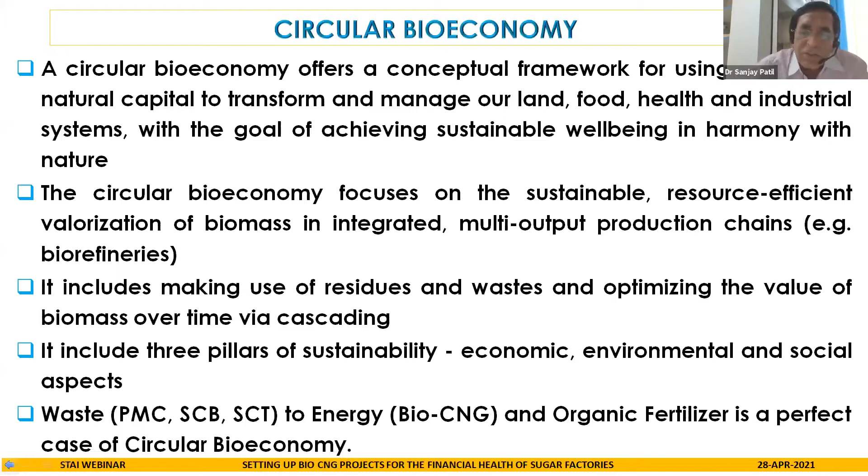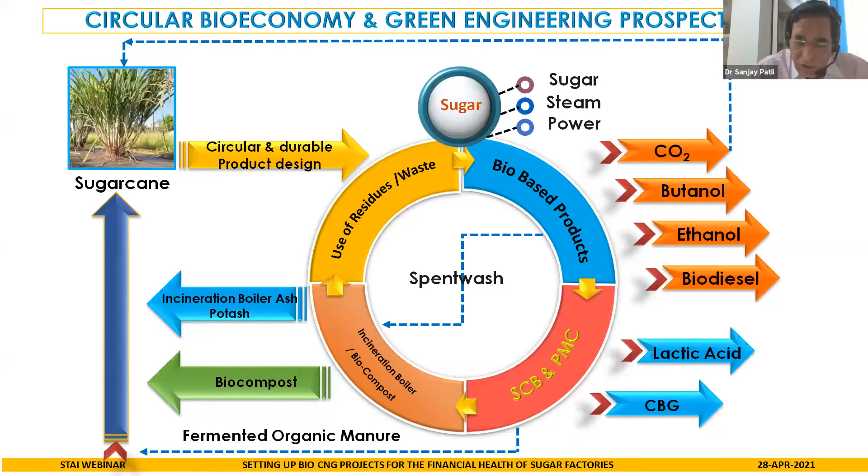And here you can see I have tried to represent the circular bioeconomy in the case of the sugar industry in this diagram. In the sugar industry, we produce different products: sugar, steam, power. We can also produce many other products such as lactic acid, biodiesel. We produce ethanol, we produce carbon dioxide, and CBG is one of the products which can be added to this. And while producing CBG, we can produce fermented organic manure which can be recycled back. So this is the basic concept of the circular bioeconomy, and the production of CBG and fermented organic manure perfectly fits into it.

As far as the importance of CBG production is concerned, most of you must know India imports almost 77% of its crude oil requirement and almost 50% of its natural gas requirement. The target of the Government of India for 2022 is to reduce import of crude oil and natural gas by at least 10% and increase the contribution of gas in India's energy mix from the present 6.5% to about 15%. The world average is about 23.5%. And the Indian sugar industry has a big potential to produce almost 12,777 million cubic meters of biogas per year.

And CBG on a commercial scale has many benefits. It can reduce the import of natural gas. It saves foreign exchange and strengthens our energy security. It also utilizes agricultural waste and other waste such as cattle dung to produce CBG. And it is very important to reduce emission and pollution levels, and it can generate rural employment and increase farm incomes.

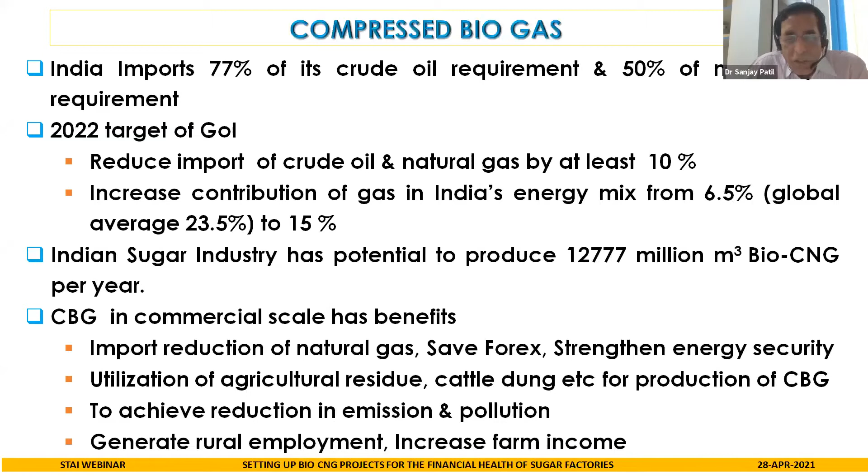Mr. Joseph has already dealt with the SATAT program. It is launched by the Ministry of Petroleum and Natural Gas, providing a developmental effort that would be very useful for vehicle users as well as for farmers and entrepreneurs. The CBG produced will be transported through cascades. Mr. Joseph has already shown a picture of cascade cylinders, to the network of the OMCs' depots where you can deliver this CNG, and it is planned to roll out almost 5,000 CBG plants across India in a span of about 5 years.

So there is a good opportunity for the sugar industry to participate in this SATAT program. And not only the SATAT program, there are many other supports given by the Government of India. As I told you, the Ministry of Petroleum and Natural Gas has floated the expression of interest for setting up CBG plants, and they are offering.

So apart from the SATAT program, the price which is fixed in the SATAT program for CBG is 46 rupees per kg. And then there is also, from the Ministry of New and Renewable Energy, notified central financial assistance of rupees 4 crore per 4,800 kgs of CBG per day, and a maximum cap of about 10 crore rupees per project.

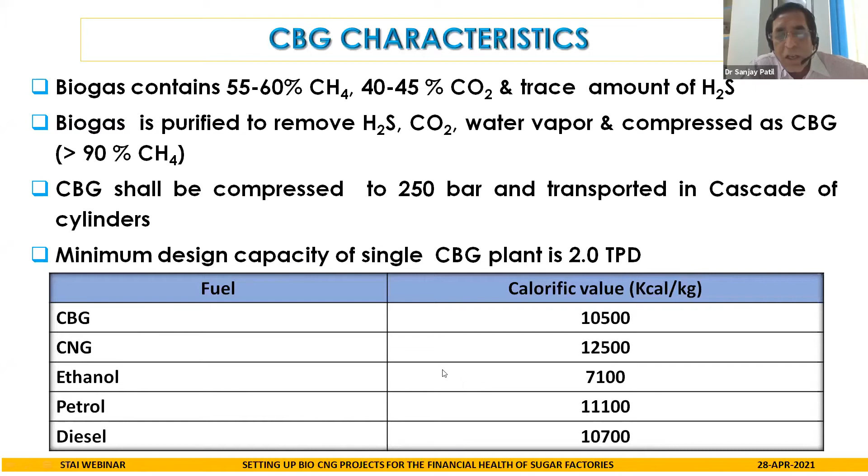The CBG has to be compressed to 250 bar and transported in cascade cylinders. The minimum design capacity of a single CBG plant is 2 tons per day, as per the expression of interest floated by the government. And you can see in this table, I have tried to compare the calorific value of CBG with other fuels, and the calorific value of CBG is quite good compared to even ethanol, and therefore in future we will have very good potential for marketing CBG.

In VSI, we have been working on the production of biogas from various raw materials. Now we are setting up 2 pilot digesters with some financial assistance from one of our member sugar mills, where we will try to maximize the biogas yield from PMC, sugarcane bagasse, and sugarcane trash, and also try to use a mixture of all three raw materials. And, a very important aspect, we will also try to evaluate the efficacy of the solid and liquid fertilizers, the digestate coming out of these digesters, because this is going to be really important for the cost economics of the CBG plant.

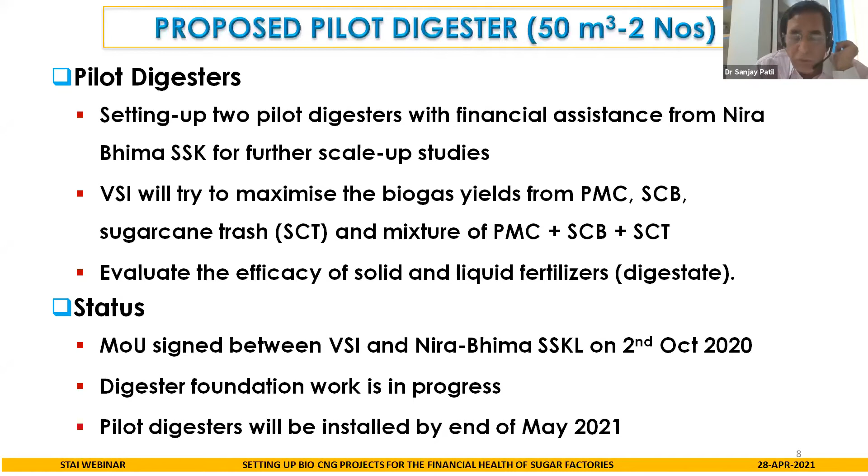Our MOU with this sugar mill, Nira Bhima, has been signed. Our digester foundation work is in progress, and by the end of May, probably we will be able to commission these digesters. I am giving you, based on our laboratory research, the present status of our research and the theoretical potential. From PMC, we can expect on a wet basis about 130 to 150 cubic meters of biogas. And right now we have achieved 120.

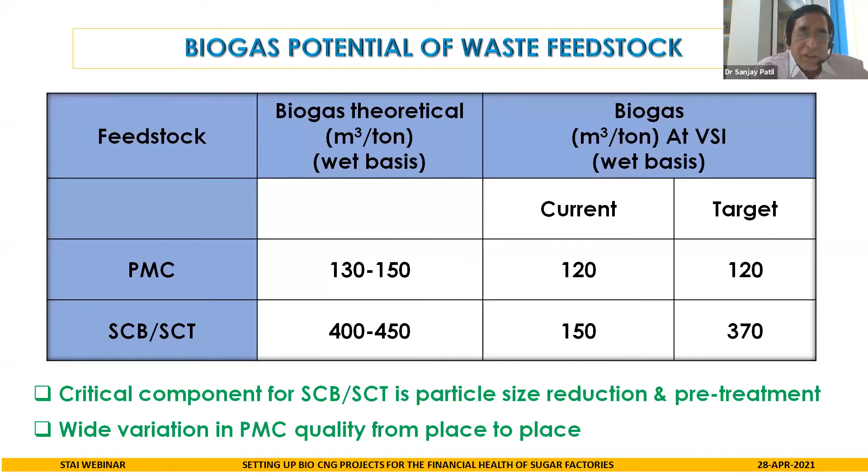That was our target. From sugarcane bagasse and trash, the estimated theoretical biogas yield is somewhere around 400 to 450. Our current yields are about 150. We want to reach about 370. But Mr. Joseph has explained that even if you go up to 200 or 250, that will be quite economical. Of course, in the case of sugarcane bagasse and trash, the critical component is particle size reduction and what kind of pre-treatment you are going to use. And as far as PMC is concerned, there is wide variation in the composition of PMC from place to place, and therefore there will be a good amount of variation in the biogas yield from PMC also.

So these are the technology components of the CBG plant. I am considering the use of lignocellulosic raw materials also, and therefore I am considering pre-treatment in the case of biomass and other agro waste. Then it will be followed by anaerobic digestion, conversion of organic matter to biogas. Here we'll try to maximize the yield from PMC and other agro waste.

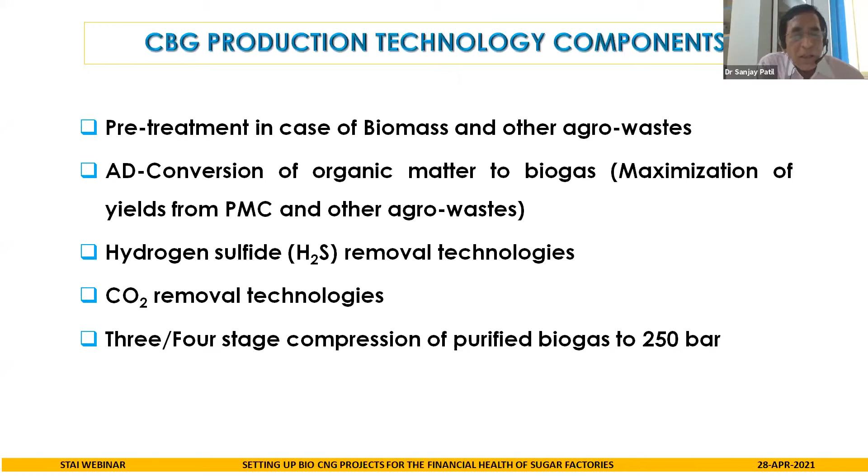Then there are technologies available for hydrogen sulfide removal. There are technologies available for carbon dioxide removal also. And this will be followed by 3 or 4 stage compression of purified biogas to 250 bar.

In fact, in pre-treatment, we have been using different kinds of pre-treatments. We have very successfully used hydrodynamic cavitation. It is a patented technology. And very briefly, I will explain that cavitation is a phenomenon of formation, growth, and a very rapid collapse of

cavities in the liquid. And the collapse of cavities generates localized hotspots with very high pressure and temperatures, with formation of localized shear on the molecule, and this leads to the formation of highly oxidant OH radicals. The shear and the OH radicals then pretreat the lignocellulosic biomass physicochemically, favoring the utilization of sugarcane bagasse and sugarcane trash. We are also trying to use steam explosion.

Steam explosion is a physicochemical treatment technology in which biomass is heated to about 160 to 260 degrees centigrade at a pressure of about 7 to 50 bar for a very short time of about 30 seconds to 20 minutes. And then the pressure is rapidly released, causing an explosion effect on the cells of the molecules of the lignocellulosic biomass, and this treatment then helps in biogas production by loosening the hemicellulose and lignin molecules.

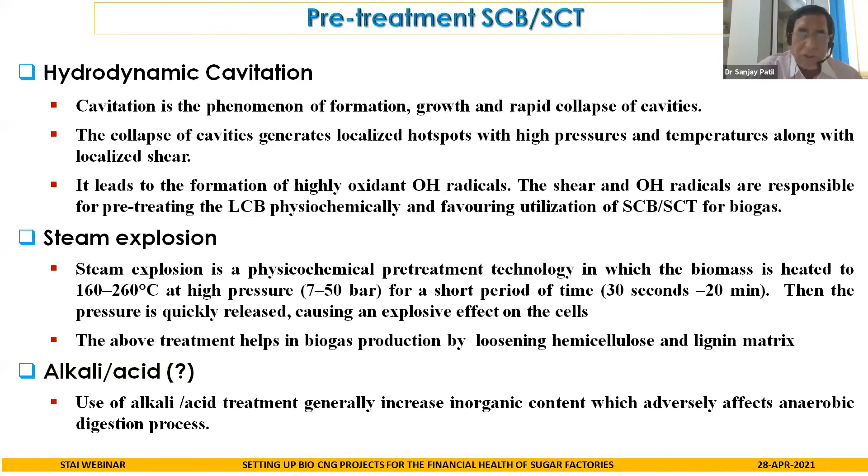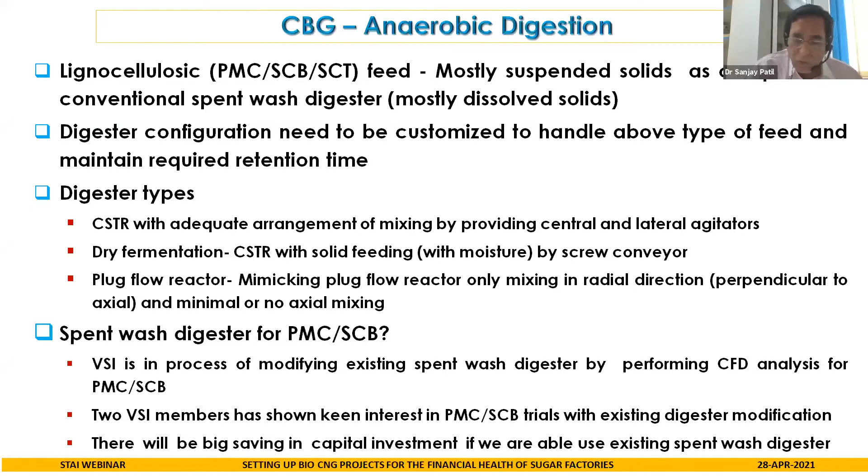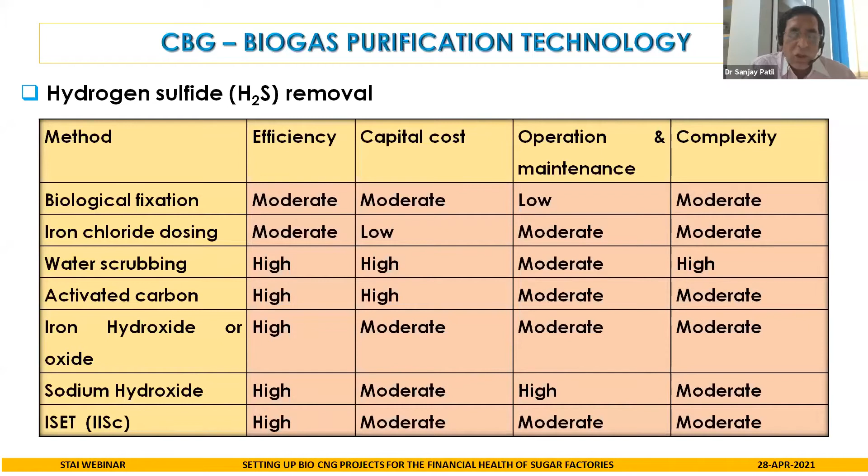In fact, for hydrogen sulfide removal, there are different technologies available. We have many plants based on biological fixation. In Maharashtra, we have about 4 plants which are using biological fixation, and this technology has been used very successfully. But there are many other technologies available. I have given some pros and cons. I may not be able to go through all these technologies, but depending on your location, depending on your priorities, you will have to select one of the technologies.

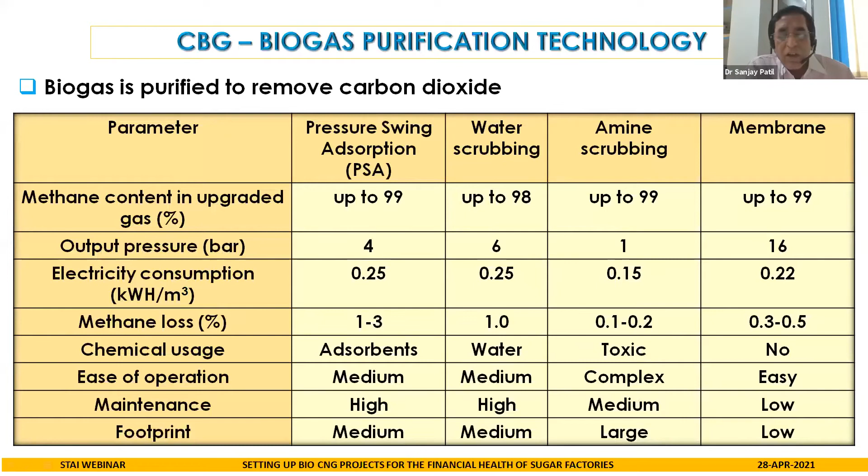Then for carbon dioxide removal also, there are many technologies available. Mr. Joseph has already shown this slide. We have pressure swing adsorption, water scrubbing, amine scrubbing, and membrane is the recent addition, and membrane has got very good advantages. And depending on your requirements, you will have to select one of the technologies.

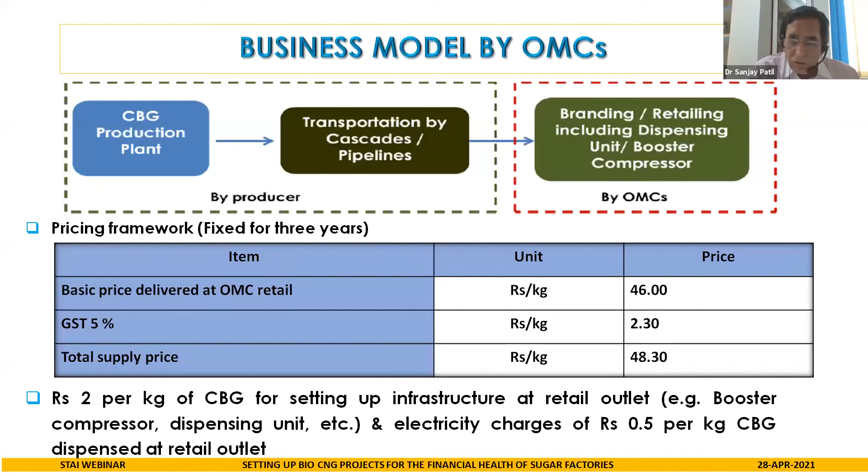In fact, you can also set up your own retailing unit, and for that purpose, the oil companies can give you additional 2 rupees per kg of CBG for setting up infrastructure at retail outlet, and rupees 0.5 per kg for electricity charges. And of course, the basic price, as explained by Mr. Joseph, is 46 rupees plus GST. So this is the price being offered by the oil companies.

I will now come to some of the models which we are proposing. You can see this model. In this, we are considering distillery with an incineration boiler. So when you have an incineration boiler, probably you are not using your press mud cake. So that press mud cake can go for CBG production. And this is a very important aspect. Please note it down.

In CBG production, apart from the raw material price, the second important price is the electricity price in the cost of production. And therefore, if you can provide electricity from your incineration boiler, because your incineration boiler is going to run 300 days, if you can provide electricity and steam from your incineration setup to the CBG setup, then probably you will have very good advantage. So that is what we are considering here, that the incineration boiler will run for 300 to 350 days, and that will provide steam and power to the CBG plant. And the power cost in CBG plant is going to be a very critical aspect.

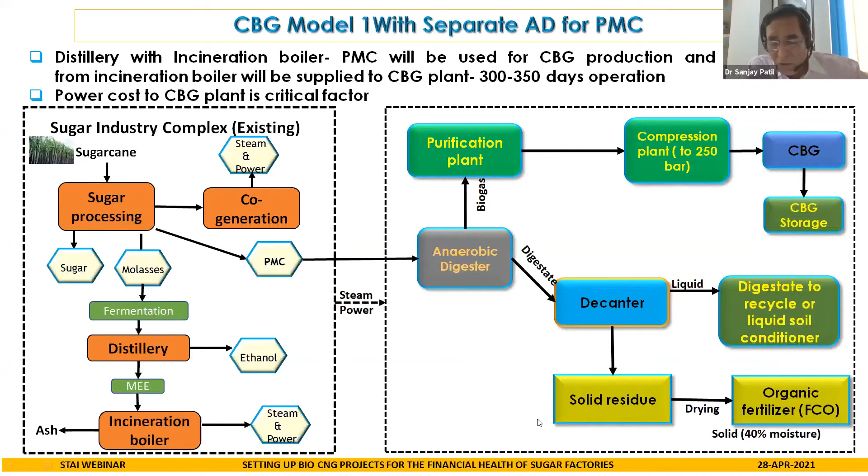And then for this press mud cake, you can have a separate anaerobic digester, and from this anaerobic digester, the biogas will be purified, compressed, and the digestate will come out. We can use decanter to separate the liquid and solid, and the solid can go for drying, and you can sell this as fermented organic manure, and even the liquid will go as the soil conditioner. And we are doing a quite good amount of research on these two products. What will be the potential of these two products as far as the value is concerned?

Then the second model we are considering, where in distilleries we already have anaerobic digestion, and this biogas we can take for purification. And if you can provide some press mud cake, of course you know that the anaerobic digestion in the distilleries won't run more than 270 days. So on an average, they will run for 250 days. You have to provide CBG 300 days to the oil companies, and therefore you will require an additional digester which will run for about 50 to 100 days. So you will have to start this digester at least 15, 20 days prior to stabilize this digester, and then produce biogas in this digester in the off season and supply it to the oil companies.

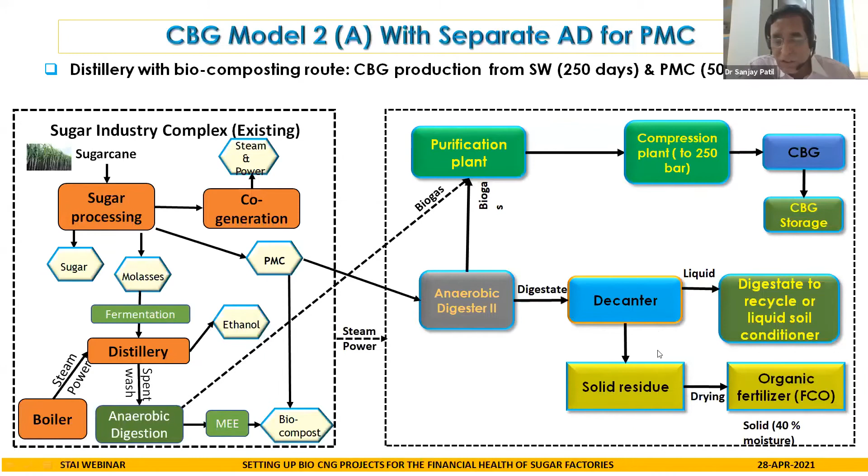Of course, for the spent wash digester, you will have to go for zero discharge. But from the press mud cake, as per the new norms, and this comes under the green category, you can produce the solid and liquid conditioner, and you can sell this. This is not zero discharge norms.

Then if you have existing anaerobic digester, this is what we are working on, that it will run 250 days on spent wash, and we are trying to modify this digester in such a way that we will be able to use press mud cake in this digester also, so that this digester will run about 50 to 100 days on the press mud cake. And therefore you will avoid the cost of establishing a separate digester. Of course, in this case, you cannot produce the fermented organic manure or the liquid conditioner. You can take this biogas purification and take it to the compression.

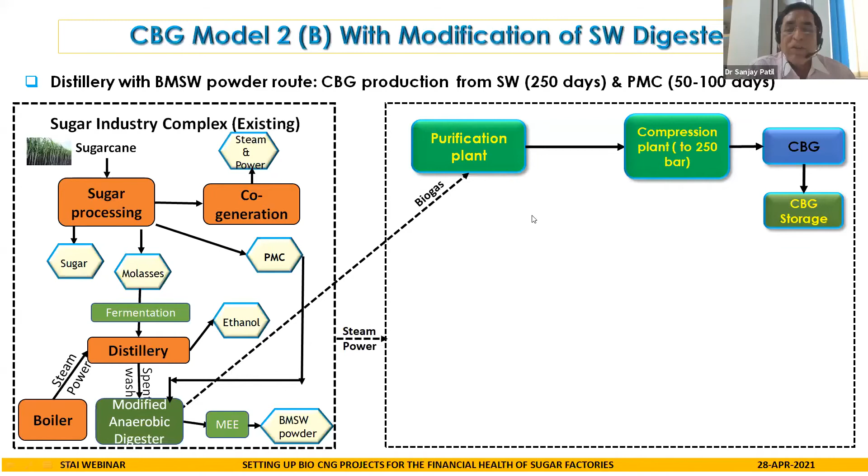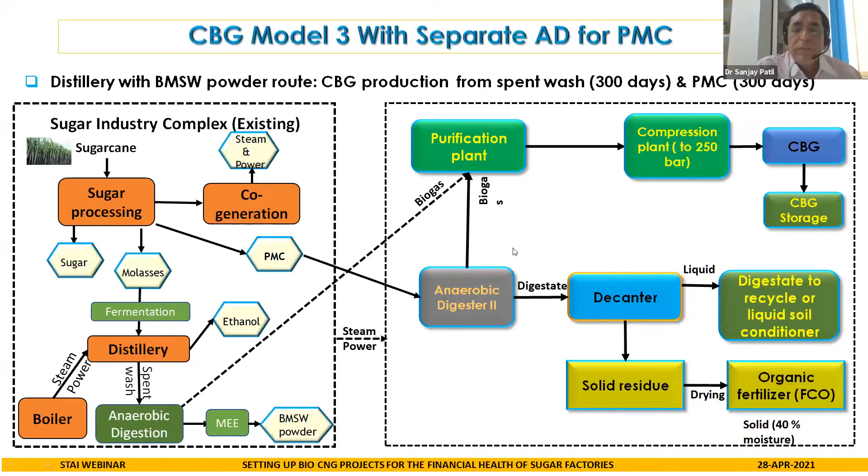I will try to give some economics. This is for the existing biogas to CBG. This is not for the PMC to CBG. So here we are considering about 1,000 meter cube of biogas generation per hour.

That is about 24,000 cubic meters per day. These are the characteristics of the biogas generated. It will contain about 58% methane, 35% CO2, 3.5%, because this is from spent wash. It will contain about 3.5% of hydrogen sulfide. So these are the characteristics.

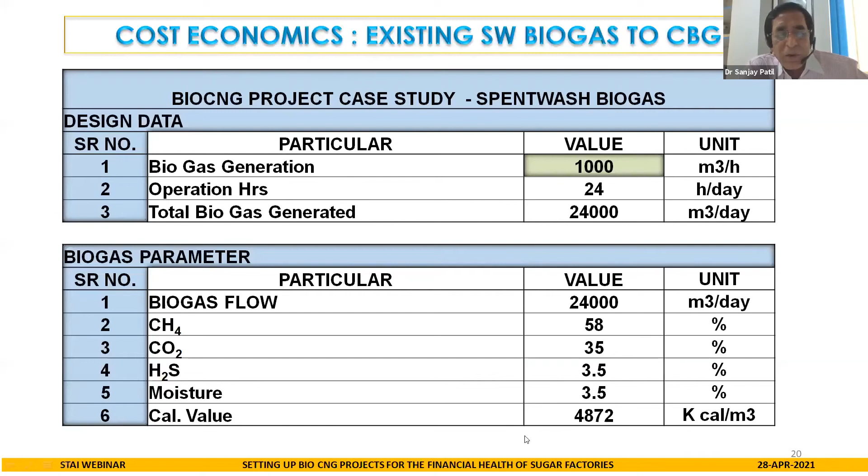This is the quantity of CNG which can be generated from this 24,000 cubic meters of biogas. In terms of kg, it will be about 10 tons per day. It will contain about 95 to 96% of methane, 4 to 5% carbon dioxide, and a little amount of hydrogen sulfide. So these are the norms required by the oil companies.

Now this is the estimated cost of our plant for removing the H2S and CO2, compression to 250 bar, biogas piping, storage cascade, and the other civil and structural work. Of course, in this, there is no cost of digester considered. This is for the existing spent wash generated biogas to CBG. So we are considering a capital investment of about 15.5 crores. If you include a PMC digester, depending on the technologies and the type of biodigester, I think this can go to about 30-35 crores.

And this is the operating cost. Of course, this operating cost will vary depending on what H2S and CO2 removal technologies you are going to use. Here, in a particular case, we have worked out the cost economics. You can see that because this is attached to our cogeneration unit, we are considering an electricity price of 6.7 rupees per kilowatt hour, and then you can see caustic, nutrient, and other. So the total operating cost is about 3,00,000 rupees, and that comes to about rupees 28.8 per kg of CBG produced.

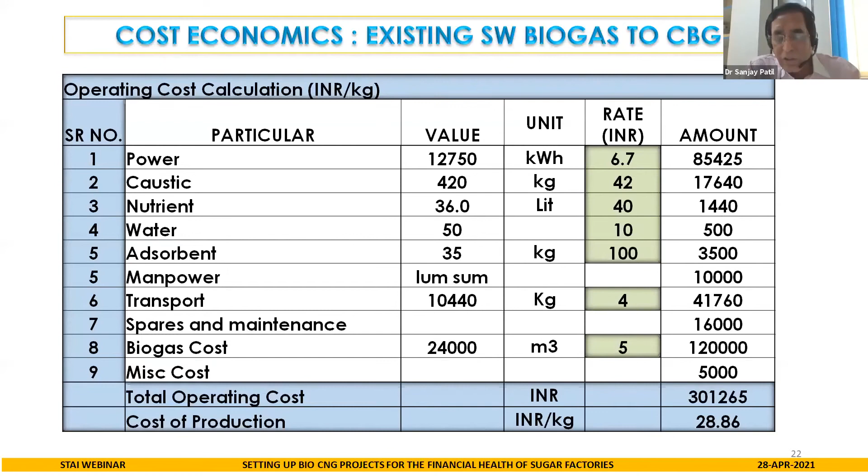So my intention here is to explain that your CBG plant has to be attached to your distillery plant, and you can design your distillery boiler in such a way that it will provide electricity not only to your distillery unit, but also additional electricity to your CBG plant. Then your cost economics will become very favorable.

So here you can see the profit generated. If we consider the 46 rupees price, and the total expenses I have explained of 28.86 rupees, your payback is somewhere around 1.77 years. This is a simple payback. In this case, you can also produce CO2. We have not considered CO2 revenue, and we have also not considered the additional revenue if you use PMC, sugarcane trash or sugarcane bagasse for the fermented organic. If you consider this, we will have to work out separate economics.

The other important aspect is that you can sell CBG, as explained by Mr. Joseph, for industrial use also. There is no restriction on that. In fact, some of the plants installed in Maharashtra are selling it in the industrial area, and they are getting a price of about 60 rupees per kg. So nearness to an industrial area will be an added advantage. Nearness to the CNG depot of oil marketing companies will also be an added advantage, because you have to bear the transport cost of the CNG to the oil depots.

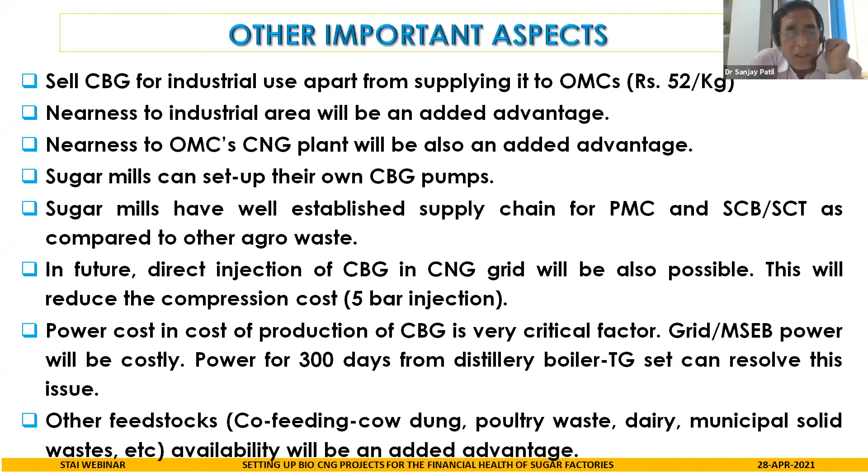Power cost in the cost of production of CBG is a very critical factor. Grid or MSEB power will be very costly. Power for 300 days from the distillery boiler and TG set can be very important. Other feedstocks, such as co-feeding with cow dung, poultry waste or dairy waste, and their availability will also be an added advantage. Sugar mill capacity, attached distillery capacity, distillery operation days, and availability of press mud cake will determine the CBG plant capacity.

Someone was asking this question. The land requirement for a 10 TPD plant will be about 8 to 10 acres. This is for the storage of press mud cake as well as for the sun drying of the organic fertilizer, which has to be sun dried. So you will have to use some impervious concrete compost yard kind of thing. So we'll require about 1 to 1.5 acre for the cascade storage also.

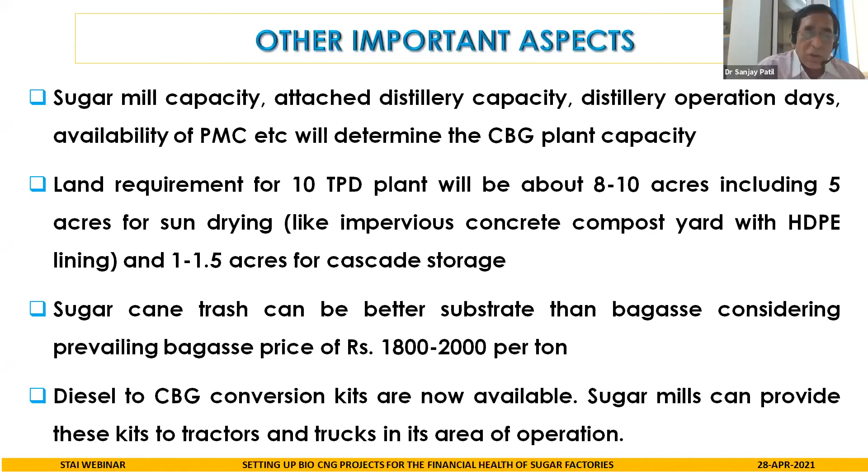Sugarcane trash can be a better substrate than bagasse because the prevailing bagasse price is about 1,800 to 2,000 per ton. And nowadays, diesel to CBG conversion kits are also available. So sugar mills can think about converting their tractors and trucks in their area of operation. So there they can install their own CBG plant and provide these CBG kits to the tractors and trucks in their area. And one of our sugar mills is now putting up their own CBG plant, and they are going to provide these CBG kits also for conversion of their tractors and trucks.

So in conclusion and coming to the way forward, I can say that the government initiatives such as central financial assistance, the CBG purchase price at 46 rupees, the organic manure production and subsidy, and priority sector lending from RBI will now be very critical for CBG sustainability. With the announcement of the SATAT scheme, the scenario is now poised to change, and fermented organic manure will have huge potential in future, and this is going to be the game changer in coming days.

So the expected price of fermented organic manure is at least 3 rupees per kg. In fact, some of them are selling at 3 rupees per kg, but the expected price can go up to even 7 rupees per kg. And selection of appropriate technologies for anaerobic digestion, H2S removal, and CO2 removal is very important. And this is going to be a critical factor when you are going to install the CBG plant. Production cost will be site specific and technology dependent. So what technologies you select for H2S and CO2 removal are going to determine your production cost.

I will say that in future, every sugar mill or distillery complex can have a CBG plant. OMC should pay transportation cost at actual, as in the case of ethanol. Now they are paying the transportation cost for ethanol also. So if that can be done... there are no oil depots available nearby, so they will have to transport it to long distances. So probably OMC may give us the transportation cost.